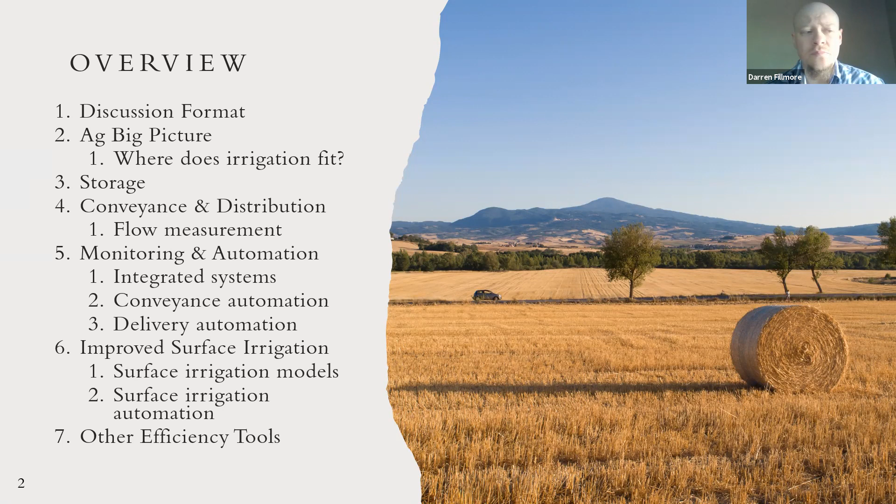So foundations of agriculture, kind of the introductory topic slide. And this is really basic stuff. I don't present it because I have any impression that you folks don't understand it, merely to kind of set the stage for what we want to talk about, and I'd like to hear your perspectives on where irrigation fits into agriculture and why your students are interested in it.

So one aspect of agriculture is, of course, crop production. One of many aspects. If we look at agriculture as a whole, and especially sustainable agriculture, a lot of other items come up, such as society and environment and economies and so forth. But certainly crop production is a major part of agriculture. So we'll focus on that one.

And then several foundations that underpin crop production. Big one, of course, is soil moisture management. In irrigated agriculture anyway, that's something we intend to manage. And then that overlaps salinity management and nutrient management. So those do have their own components, but also there's a little bit of overlap with soil moisture management.

Now, in this graphic here, I'm trying to depict that there are a lot of other foundational principles to crop production that we're not addressing. So the little pyramids in the background are an attempt to show there's so many other things like pest management and variety selection and so on and so forth that we're not going to even come close to today.

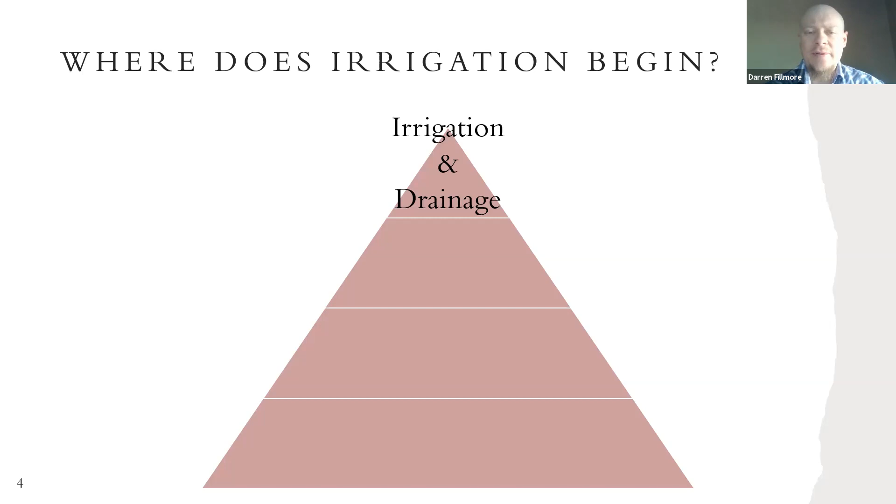So focusing on that center pyramid of soil moisture management, really, when we talk about soil moisture management, it's irrigation and drainage. Those are the primary tools we have to manage soil moisture, at least in irrigated ag. And we'll talk about some of the foundational principles beneath that. And again, some of these topics aren't necessarily directly under the field of irrigation in terms of study and practice, but they certainly are foundations that we need in order to be able to do irrigation.

So I want to acknowledge those and hopefully get folks thinking about how they fit into their programs, and how your students might be able to branch off and find the niche that interests them the most.

So water supply planning, obviously we can't irrigate without a water supply, and the planning of how to maintain and secure that water supply is in itself a fascinating field, and folks build their whole careers on water supply planning, especially in the arid parts of the world where there's a lot of demand for the water and not a lot of supplies. It can be a full-time job trying to secure those supplies and keep them available for users.

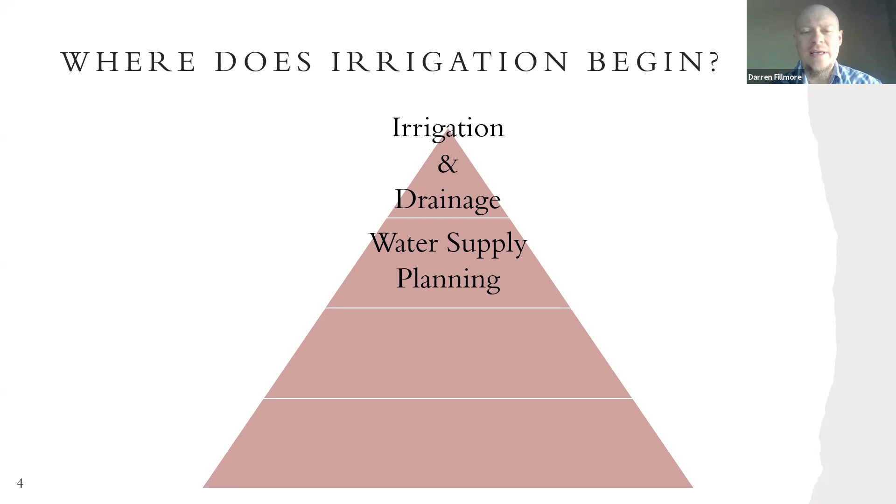And that gets into watershed and aquifer management. Obviously, in order to have a water supply, you need to understand, manage, and protect where that water supply is coming from. So that typically means a watershed or an aquifer. Again, not a real or a specific correlation to irrigation here. That's a little bit peripheral.

Watershed science, folks who work in that might call themselves watershed scientists, hydrologists, and so forth. They might work for the Forest Service or the USGS, not necessarily directly in irrigation, but they still very much affect what we all do. Similar with aquifer management, your hydrogeologists, those sorts of folks who study groundwater may not be thinking of themselves as irrigation managers, but in a way they are.

And then the final foundation, which really I think underpins all of this, is water policy. I bring that up because you may not acknowledge it or even think that's where you're going to be going with your career when you start out in irrigation. You tend to realize that it all comes back to that. You can't really get to the technical side of irrigation if somebody somewhere isn't handling the water policy well.

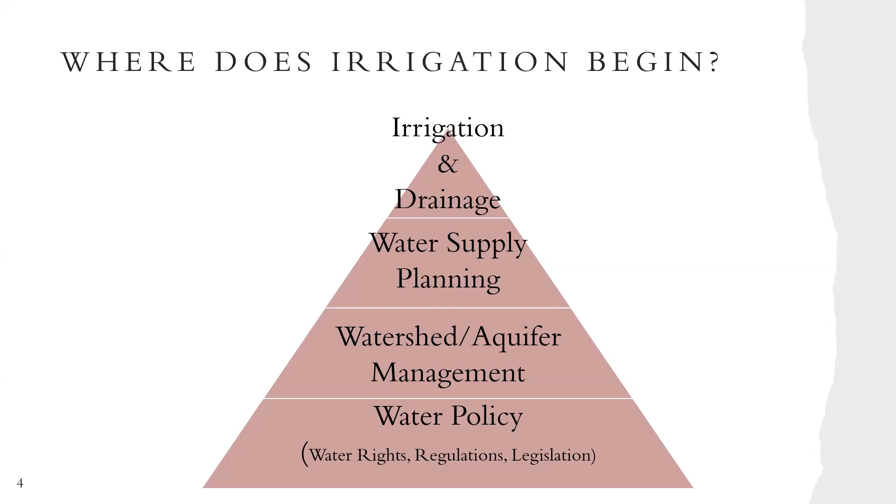I'm assuming I'd hear if anybody were speaking, but I'm not sure. Yeah, no comments yet. Well, we got a quiet bunch. Might be a quick presentation, folks. Well, I'm looking for some feedback here.

Okay, so finally getting into the topics we said we're going to discuss, conveyance and distribution. So I separate those. Some folks may not see the need to do that. Conveyance in my mind is your river systems and large canals that move water from its source and its storage points into the use areas where it can be distributed. So our distribution systems then become branching laterals, whether those are pipelined or open channel, that carry water to the points of use, delivery points. So that's the way I distinguish them.

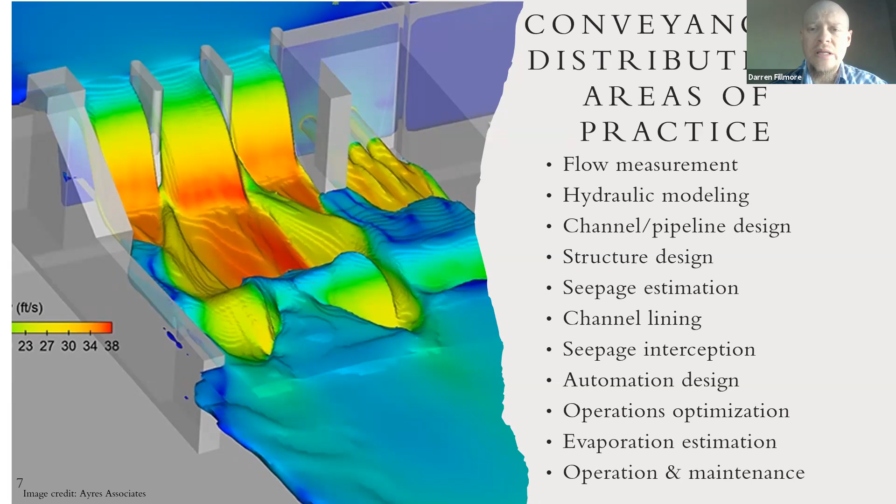Flow measurement technologies. So just an aside here, folks, you notice I'm not getting into any of the technical details, the theories or the equations or anything, really just getting through a broad overview of some of these topics. I imagine a lot of your curriculums already include these things.

I just present them here as ideas of things I think would be useful from my perspective in industry. Obviously, I'm not in academia, but from an industry perspective, these are things that would be valuable for new graduates and folks who are furthering their education.

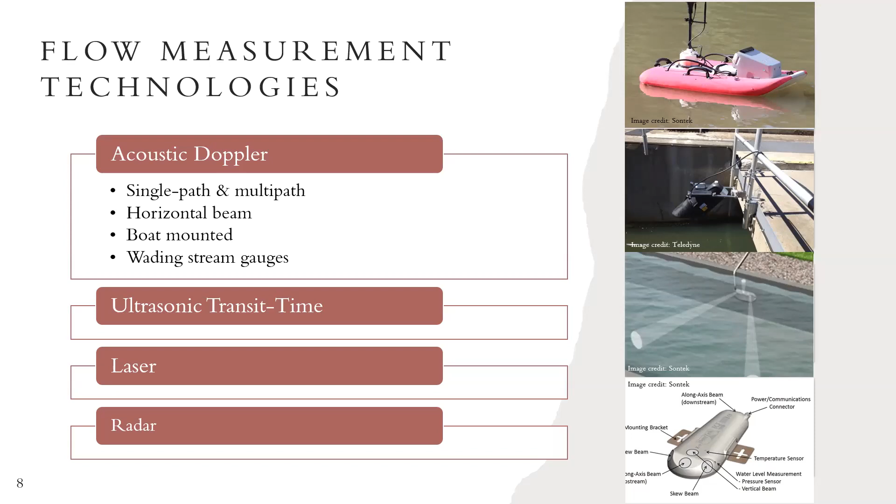Darren, we just lost your shared screen. Looks like I lost my connection there. Oh, the share's gone too? Yep. Yeah, I lost my connection there. My apologies. Okay, I think we should be back. Forward. All right. Back where we left off, I believe.

So we're talking about, or at least I was talking about laser and radar measurement before I realized I was talking to myself. So laser and radar are both technologies that are deployed above the surface of the water. There's some significant advantages to that, especially when you're dealing in dirty water or salty water that can inhibit some of the measurements for the devices that you'd be placing in the water.

Some do a better job than others of profiling the entire velocity profiles. I think radar, for instance, can only really pick up the surface, and you have to estimate how that varies from the rest of the profile. Laser, from what I'm told, can sample from within the depth profile, but can't say I have any experience with those ones. They're pretty pricey units. They were.

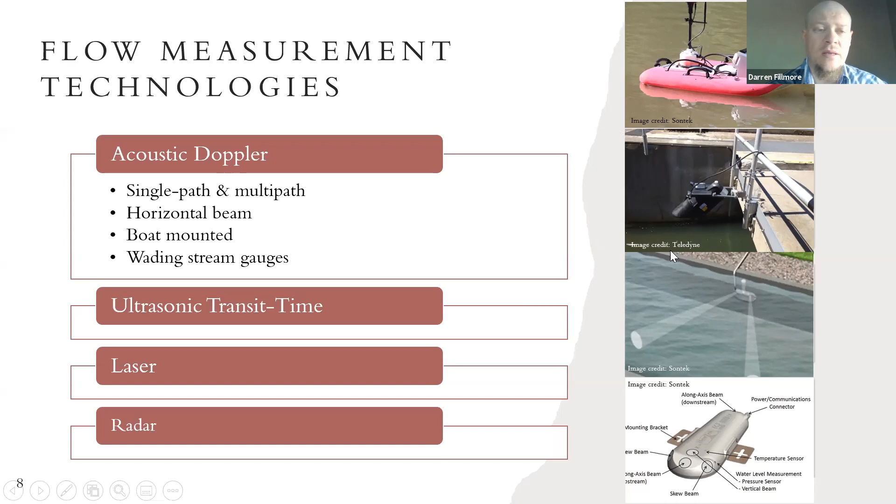Anybody have any particular experience with any of these devices or any questions about them? Feel free to raise your hand or just chime in by audio when you can. Hearing nothing, we'll move on to another flow measurement slide here. So a few more ways of measuring flow that tend to work in irrigation channels.

First, impeller meters. I typically think of those as a pipeline solution as well. Your impellers or propeller meters, as they're sometimes called, fill a whole pipeline and fit almost snugly in a pipe so that you capture that whole velocity profile. When they're used in open channel, it can be like we talked about before with the wading meters and the Price AA style.

Another way is a lot of times the irrigation delivery will go through a culvert to pass under a farm road, and in that culvert they'll place a propeller meter, and they don't tend to be as large relative to the total pipeline diameter as typical pipe meters. It's just a propeller that fits in very loosely in the culvert in the center part. And again, they're attempting to capture the velocity at that point and assume how the rest of the profile behaves. So there are some inherent inaccuracies with that.

Hydraulic measurement structures. So those can be fun to design. There might be a lot of folks in academia who've had some experience with those. Flumes, weirs, submerged orifices. They do have their place in open channel measurement. They can also have some real challenges, particularly in areas that don't have a lot of elevation difference. You don't have room for any head loss from flumes or weirs.

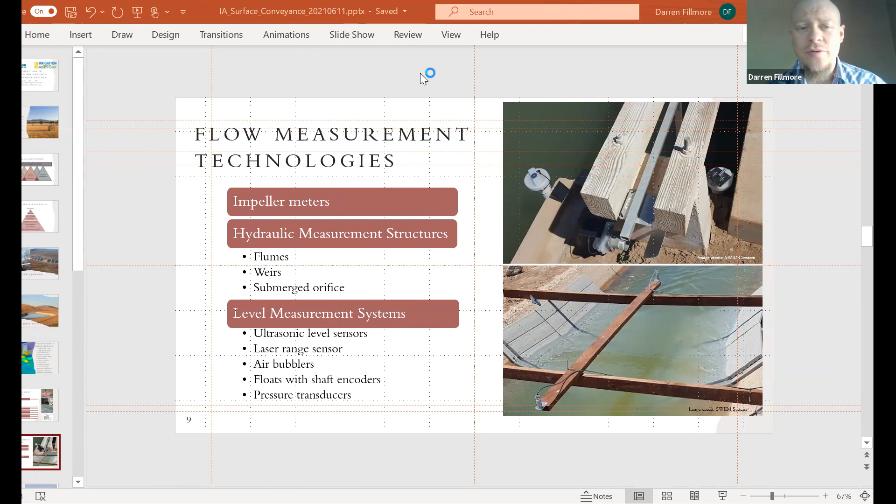So we're talking about submerged orifice measurement, and this particular solution, nothing particularly novel about it, but we're using ultrasonic level sensors to measure that upstream, downstream, and gate position. And the gate position sensor, you'll notice, does reflect off of a 45. So it's kind of an interesting application of that.

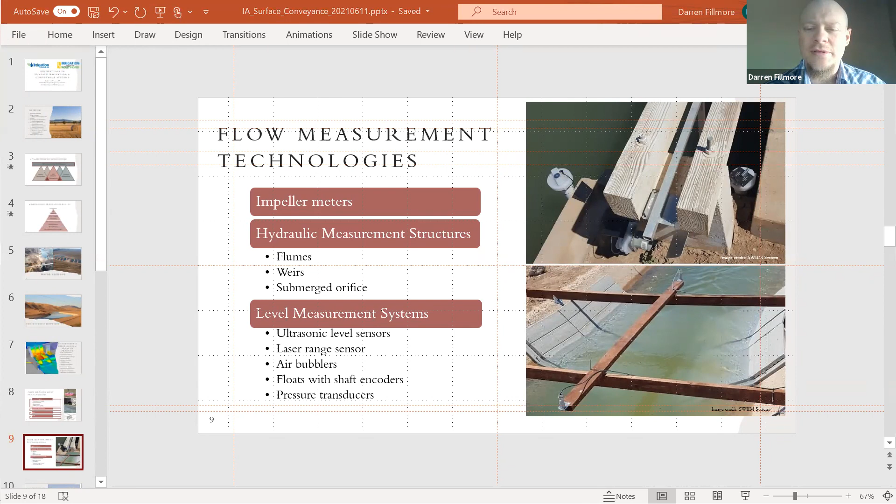Thank you, Nicole. I hadn't noticed that. Very good.

So on to level measurement. We touched a little bit on ultrasonic level sensors. Those ones pictured there are wireless ones. They communicate to a gateway that you can mount a number of feet away, and that works pretty well if you've got constraints such as right of way, or you'd have to bury conduit under a highway or things like that.

There are also wired ultrasonic level sensors that do a great job, and you get away from a lot of the problems with radio connection and with batteries and so forth. The bottom picture shows wired ultrasonic level sensors over that flume there. And those also are great because they're non-contact. They stay out of the water. They do take a lot of abuse from the sun, depending on which area you're using them in, but you don't have to worry about sediment and salt buildup and so forth on those.

Laser range sensors, another way to capture water level from above without contacting the water. They have their pros and cons too. Some of these work better than others in a stilling well situation. We have had trouble with ultrasonics in smaller stilling wells. They have to be a fairly good sized stilling well to stay away from the sides and avoid echoes. Lasers don't suffer that. There can be some reflection problems. Of course, spiders love to get in stilling wells too and mess things up.

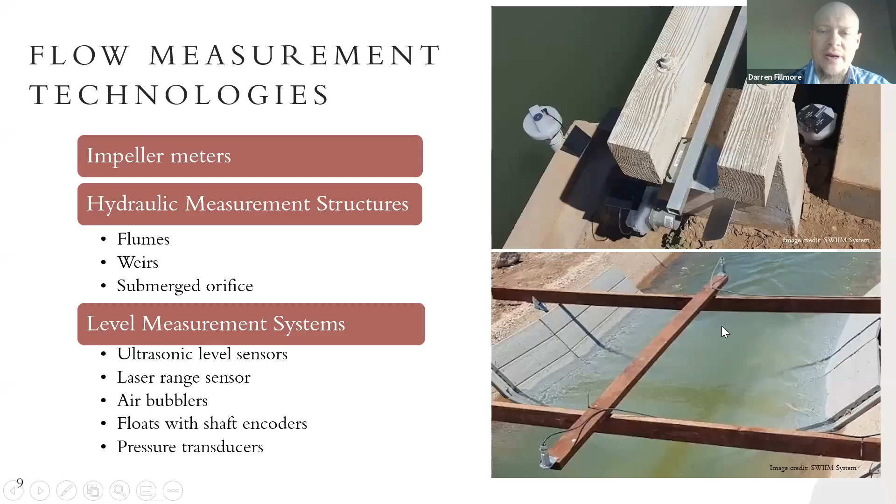A little bit more about automation from a big picture perspective. Of course, credit to Rubicon Water for these images here, and also for some of the information. So the top image shows kind of a graphic of all the different places along the flow path from the watershed all the way to the root zone, where measurement and automation can help improve the way water is used.

So there is this estimate from Rubicon that about 37% of the water that's actually diverted from storage actually makes it to benefit the crop. So it indicates there are a lot of losses along the way and a lot of room for improvement.

So first, if we were to think about automation from the top down, there's room for automation within the watershed itself before water even makes it down to the rivers and reservoirs, just to measure what's there, to help control erosion, to give feedback to watershed scientists about what kind of things are going on in the watershed, whether it be erosion or contamination, just general hydrology.

Once it makes it to storage, a lot of effort can go into reservoir operation. I imagine a lot of you folks are familiar with that. But automation has a place there, whether it's just to monitor reservoir levels, to manage spillways, and to manage releases from the reservoir. A lot of that can be automated based on the management parameters that are desired.

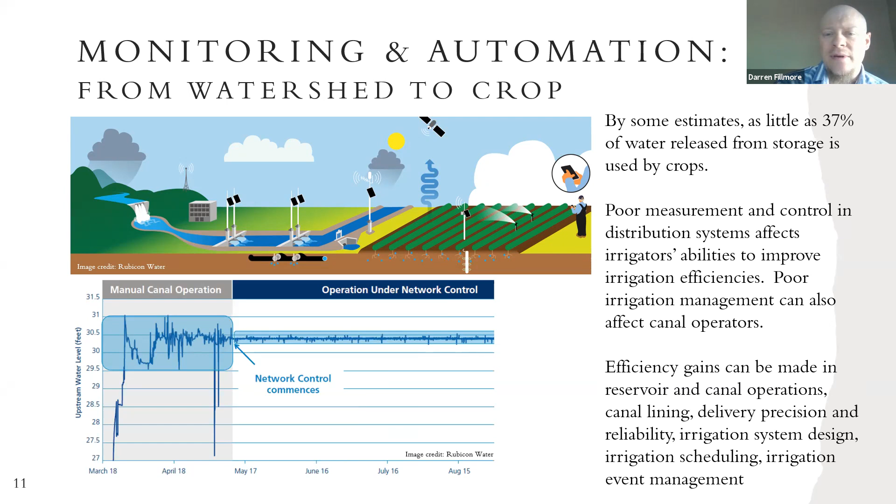There are other kind of peripheral sides of automation, both in the conveyance, distribution, and on farm, such as modeling and scheduling and things that are necessary to be able to understand some of the hardware and understand the algorithms that control it. We'll get into a little bit more of that here.

Just some slides here, again, courtesy of Rubicon Water, of some actual results. In this case, it was a spill structure at the end of the lateral that they replaced with an automatic device. The manual device on the left and the automated version on the right. A couple of things you notice is just how different it looks physically, but then in the bottom image, the amount of spill

afterward. They had enough water in that downstream channel that certainly could have been used for other purposes. And then in the right, you see there's probably still enough to keep vegetation alive, but not the steady stream you saw before. So there's some water conservation to be had there. And then another side of it is just the steady level they're able to hold there.

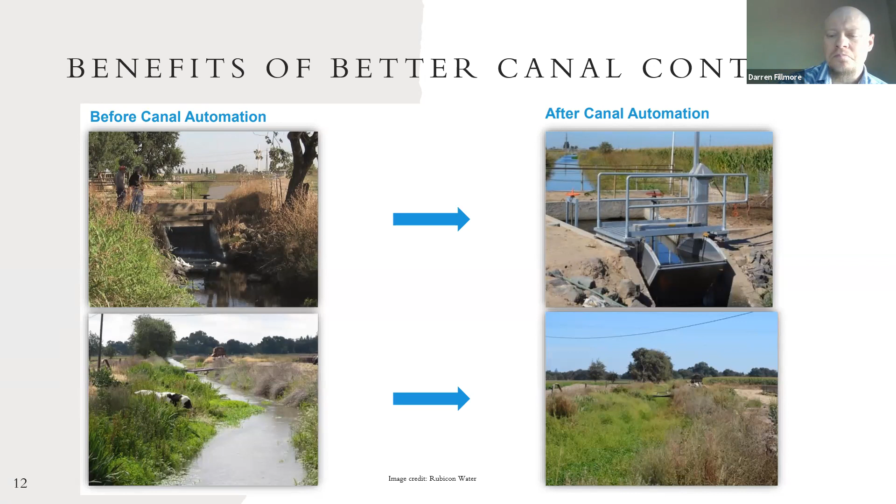You see there are two delivery gates upstream of that spill structure, Waterman style gates. I would guess those tail ender irrigators there are happier with their deliveries after this installation because they have a steady pond to pull from. A couple of advantages there.

So back to delivery from the distribution system to the on-farm. Here on this slide, we have three different examples of automation in the head ditch itself, or in the case of the one on the right, an alfalfa valve from a pipeline. A couple different manufacturers highlighted there, but all trying to achieve the same thing, and that is control in an automatic fashion the water as it leaves the head ditch and goes out into the field.

So the one on the left there from Watch Technologies, you see they've actuated what is a typical slide gate. Should have included a before picture on that, but those slide gates are ubiquitous throughout the Southwest on a trapezoidal farm ditch that just has a handle, and an irrigator has to pull that slide gate up and down to control the water through a little port in the side of the ditch. I imagine you folks are all familiar with those.

Here they just put an actuator on it, and then there's feedback from soil moisture measurement in the field and control from user devices and so forth that allow them to move that gate up and down. There have been a lot of different attempts at that over the years that I've seen, some more successful than others, but there can be some challenges to moving those slide gates, especially when they're burdened with a couple feet of water.

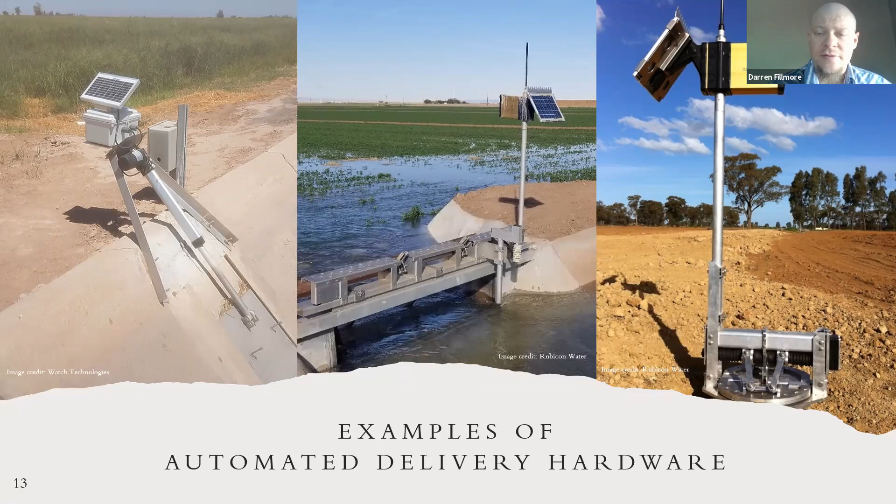And then finally, that blade valve is what Rubicon calls that, but it's an automation on the alfalfa valve, riser off a pipeline, often used to flood a field. That can be automated and controlled much the same as these other valves and gates can be. But it all depends on models and feedback either from the users or from other sensors in the field. So look a little bit more at that.

So surface irrigation, let's talk a little bit about the challenges of surface irrigation. I mentioned a little bit earlier that pressurized systems tend to get a little more of the attention when it comes to automation. The pressurized system, frankly, is a lot easier to automate. There's a lot less opportunity for user error in pressurized systems. Still plenty of opportunity for it, but less than in surface irrigation. Seems to be more of a science and less of an art.

Surface irrigation can be every bit as efficient as the most efficient pressurized systems, but it's harder to get there because there are, again, more opportunities for human intervention, and that can be beneficial or not. Also, you have factors, just limitations on flow rates, a lot of changes in soil texture throughout a field or for an irrigation set, a lot of challenges that make it difficult to manage surface irrigation and get the kind of efficiency that folks would like to see.

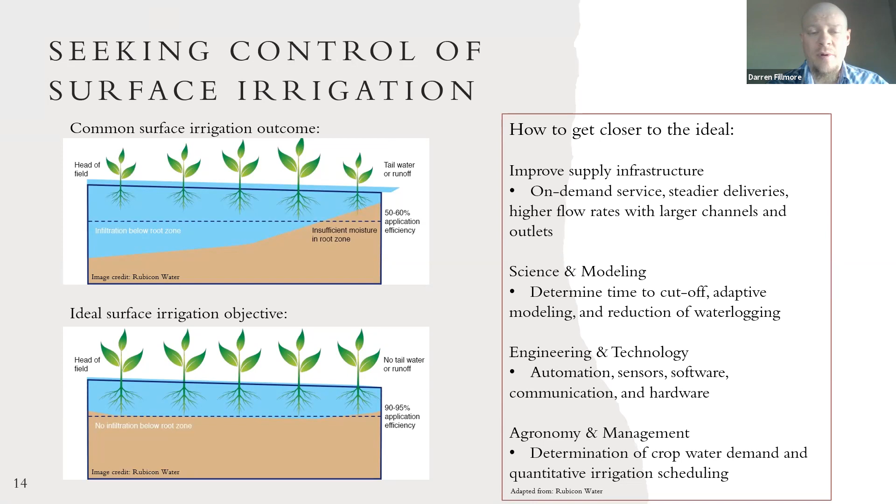Agronomy side, so determining how much water to apply, when to apply, the irrigation scheduling side of it, and then measuring soil moisture and that sort of thing. How much water needs to be applied to the field, if you want to accept some deficit irrigation, or indeed if you desire deficit irrigation for economic purposes. All of those factors come in here.

So here is surface irrigation modeling. There are a couple older ones that I've used. I imagine there are other models. Indeed, there are some proprietary ones in the industry that seem to work fairly well also. These, you may be familiar with WinSRFR from the ARS, SIRMOD from Utah State, and NRCS. A little bit older models, but they do the same thing more or less. They're looking to model how water moves across the soil and how it infiltrates, and try to optimize how much gets into the root zone, how much deep percolates, how much runs off.

One of those approaches is to use the advance and recession curves as a means of modeling the soil characteristics. That's one challenge, I think, with surface irrigation modeling, is the soil characteristics are dynamic. They're changing with every irrigation, indeed throughout an irrigation, especially early in the season. You may have a newly planted field where your furrows or border bottoms, so forth, are very permeable, and with one irrigation that all changes. And indeed throughout the irrigation, and then as the crop grows, the hydraulic resistance changes. So it's a constantly moving target to try to understand the hydraulics of surface irrigation in the field.

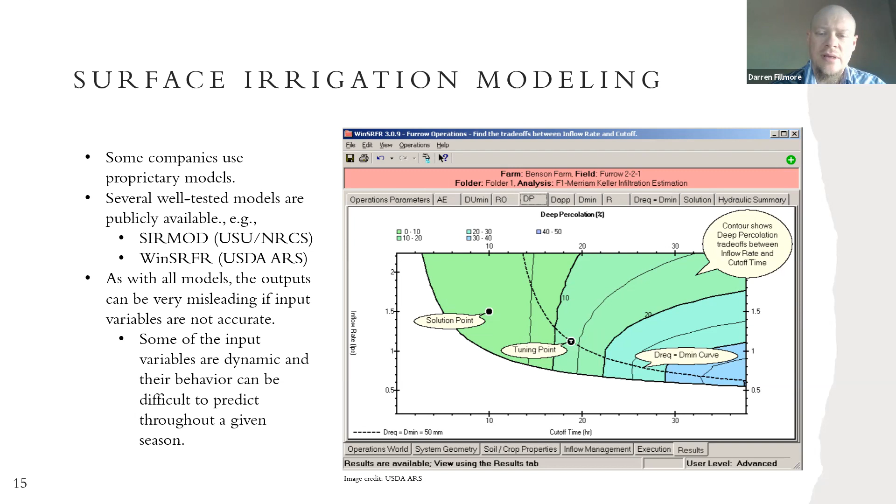Gosh, I want to go back to that and talk a little bit about that chart there. So this is about as technical as this presentation gets in terms of equations and modeling and so forth, but you can see that a couple of the parameters that you're trying to optimize there are the depth of infiltration and the depth above the surface, and then finally that cutoff point in order to get to the desired infiltration across the field.

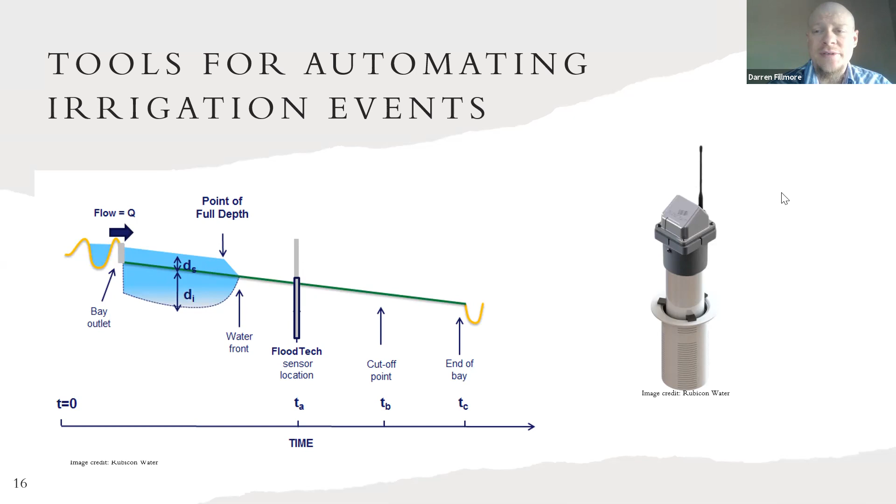Finally, the last point I wanted to make here on other tools to promote efficiency. So water accounting, it can be at the farm level, the field level, the basin level. Keeping track of how much water goes where, it sounds like a pretty basic concept, but you'd be surprised how little is known in actual irrigation systems and conveyance systems about where the water is going.

And when we get into that water policy, like we talked about earlier, they have to make a lot of assumptions about where water is and has been historically, where there may be lack of data. So the more data that we as practitioners can gather and certify as good data, the better tools that folks who are involved in the policy side will have to then give us policies that are workable.

Water balance analysis, of course, that's a very common mass balance approach to managing water. That's something that my former employer, SWIM Systems, specialized in, was the water balance analysis on farm. And it can be a great tool to understand, as you see in the image there, all the different flow paths just within a field where water can enter or exit the system. And we need to quantify as much of that as we can if we intend to optimize it.

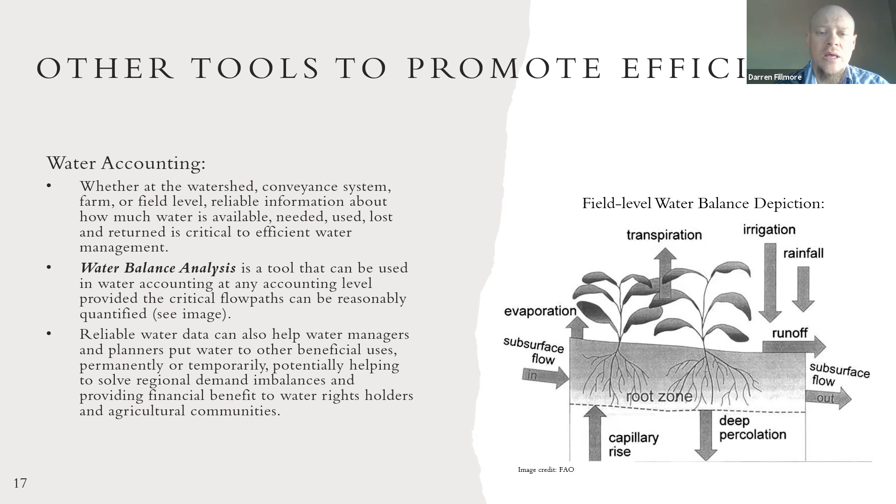So it can be a great tool to help people understand where the water is going and then be able to optimize those pathways. And say if they want to reduce how much inflow they're sending to the field, well, what happens with the water they used to be using? Would they be able to use that for other purposes or transfer it to other users? Maybe some economic impacts to that. I think that was the last slide.

There are a couple of resources I'd like to mention. I didn't get into the technical side here very much, but if you folks are interested in seeing some of the more technical aspects of this, I'd encourage you to look at the U.S. Bureau of Reclamation's Water Measurement Manual. Great resource to keep up to date when it comes to how to measure open channel surface water. NRCS has great manuals and guidelines. ARS also has some good models. So those government resources tend to be free and open.

And then online courseware, I imagine you in academia may have heard of that. There are a number of institutions who offer their lectures and lecture notes and anything aside from copyrighted textbooks publicly. And my alma mater, Utah State, has some great irrigation information on their online courseware site. There are a number of other ones that do too, so please have a look at that.